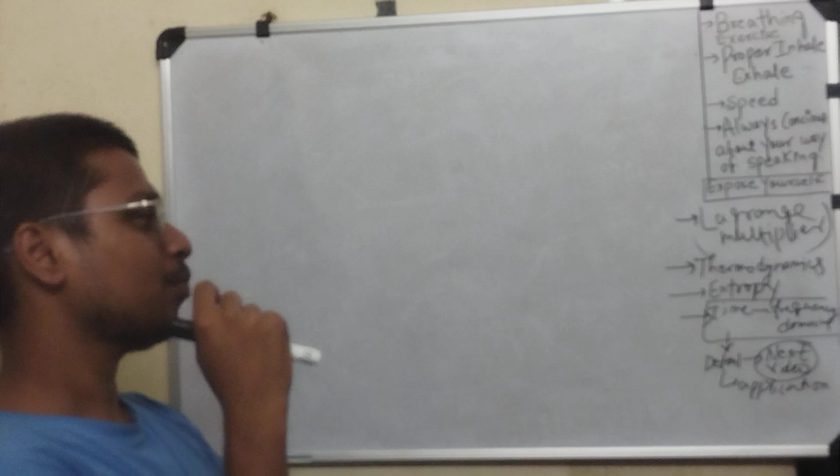We have HSA, high speed aerodynamics. Okay, so in low speed, the pressure change is so small that it does not change the density. But when we are talking about high speed flow, there is a huge change in pressure and temperature, so the density is also changing.

So the air is compressible, or the fluid gets compressed. So we have to make sure that while solving the flow equations, we consider the density field. We do not take density as constant, and we do not solve the energy equation and the flow equations separately as we have done in low speed aerodynamics.

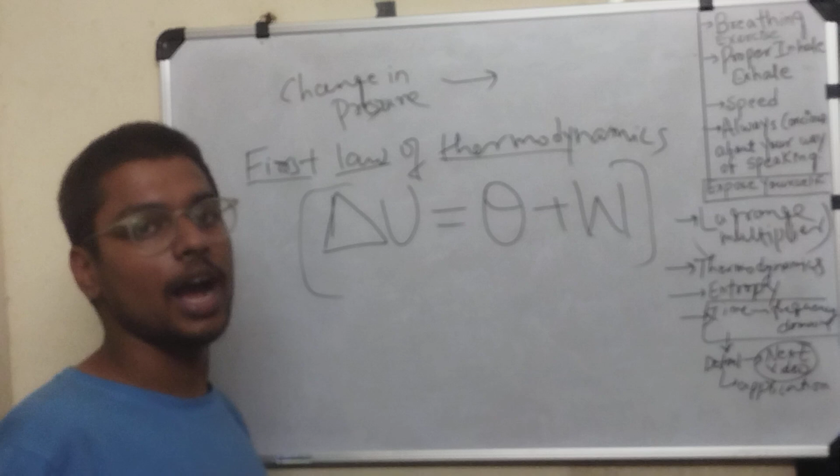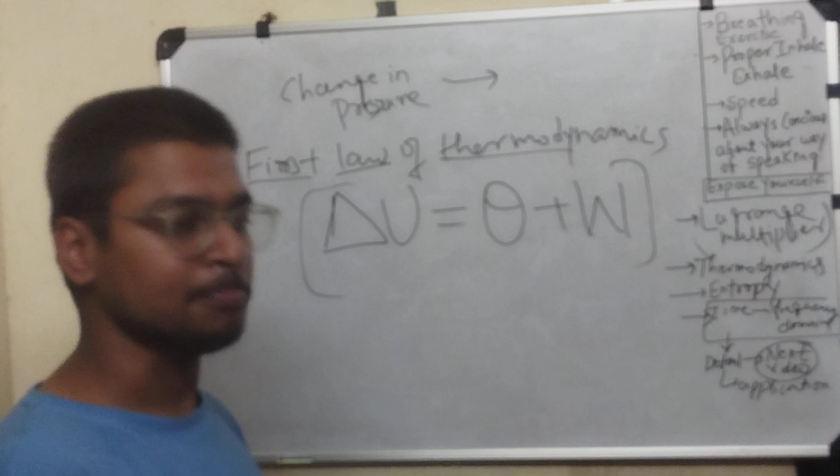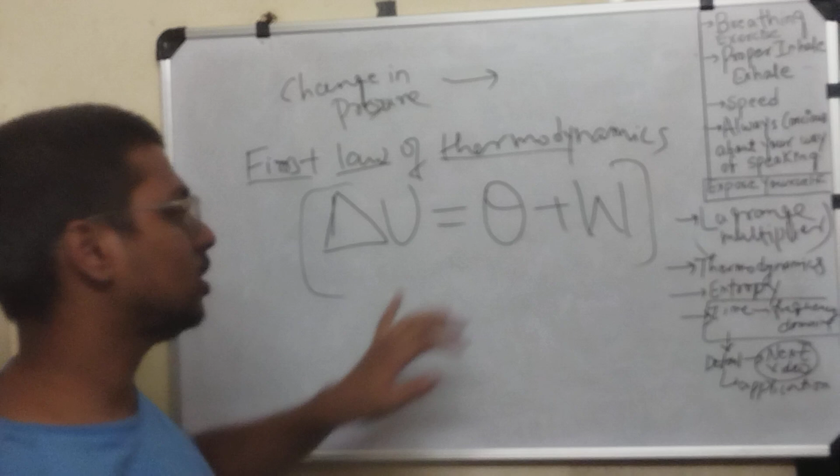So what is internal energy? Any system has particles which are constantly moving, vibrating at high temperature. So internal energy is the energy stored in the system in the form of vibration, the kinetic energy of the molecules. Q is the heat transfer, and W is the work done on the system.

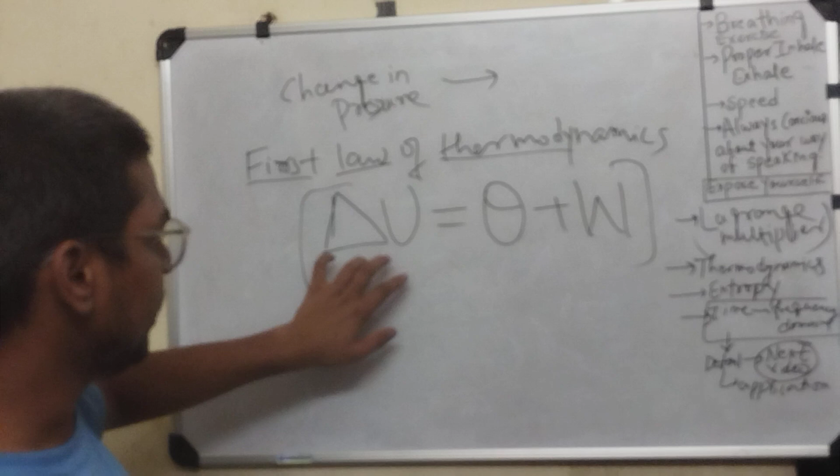So let me explain that when we go from one state to another state, the internal energy changes. Okay, so where does the energy go? It must be transferred into heat and work. Okay, nice.

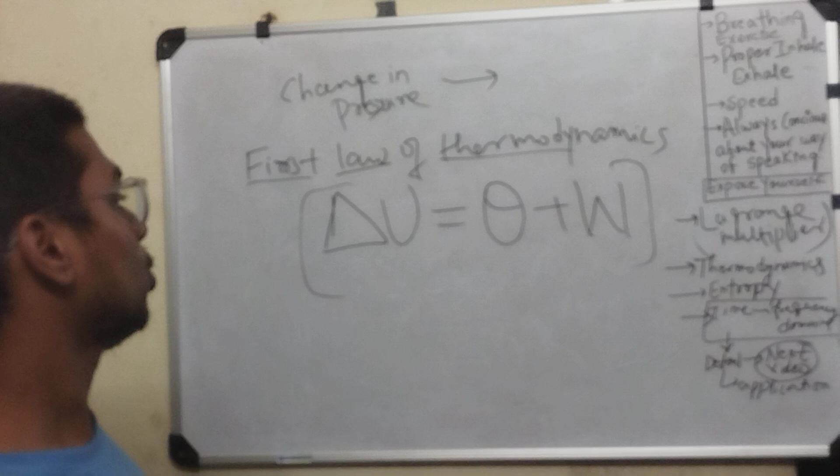Okay, let me start the discussion of entropy. I want to say where the entropy concept came from, how this word came into anyone's mind. It starts with the Carnot heat engine. You must have heard of or studied it in your class 12th exam. So in Carnot's heat engine,

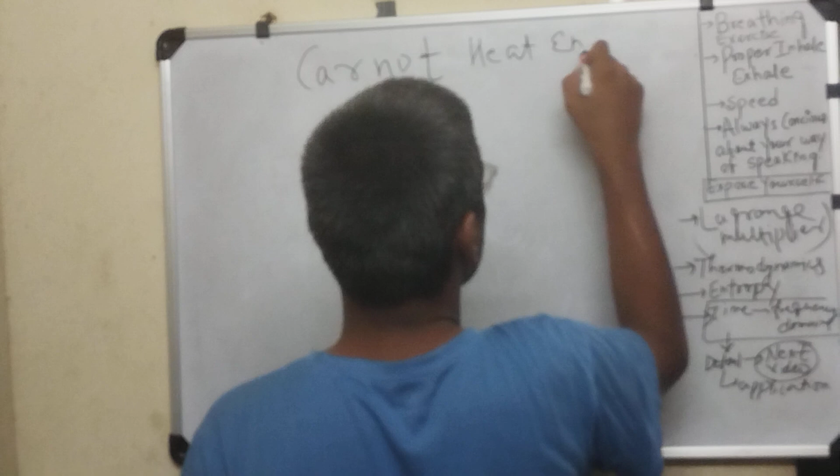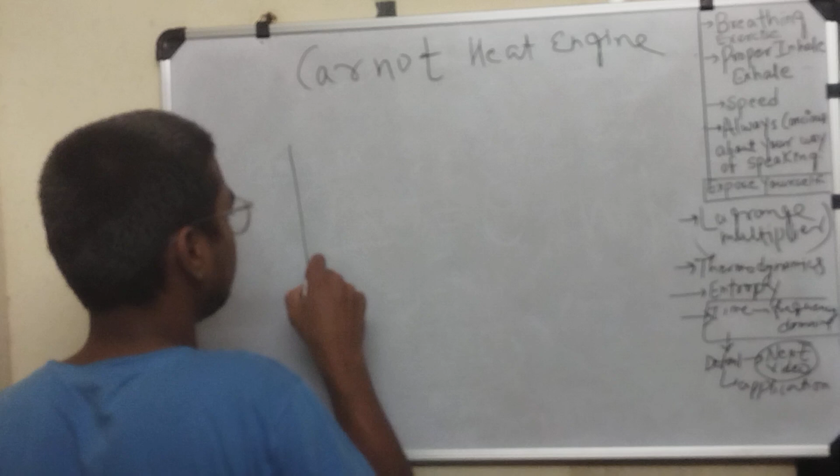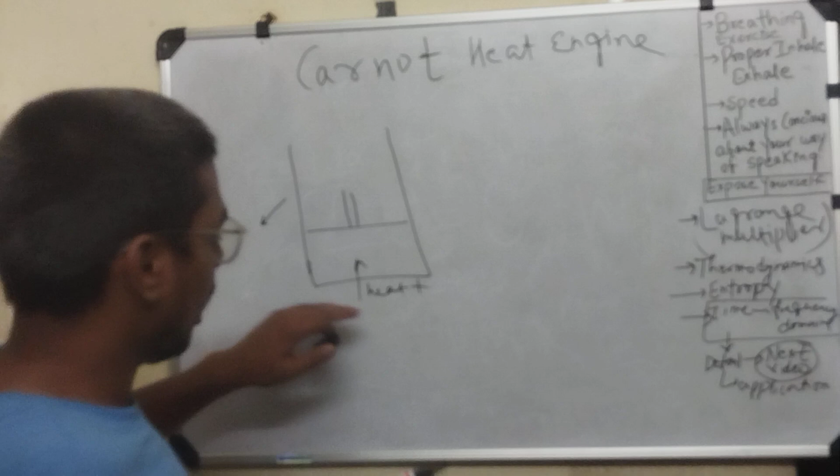Carnot is trying to see the maximum efficiency of the engine. So yeah, that is what it is all about. So there is a system, and this is the only part of the system where heat transfer is allowed. Here is the piston, and here is some flywheel, and there is some gas here, and here is the hot

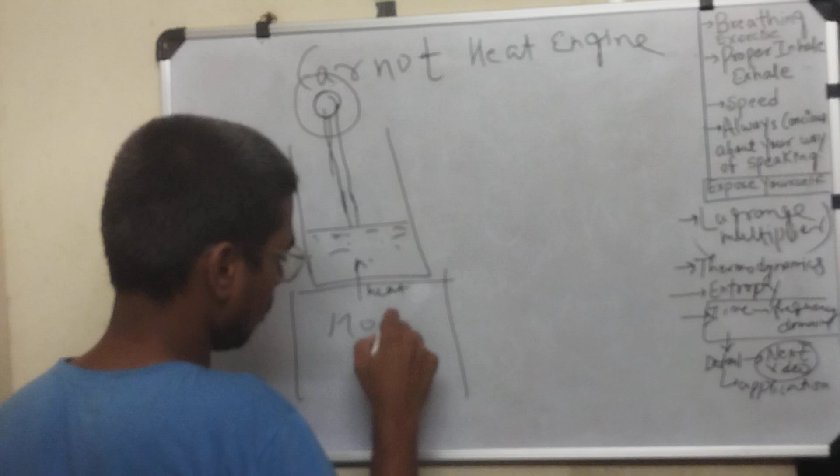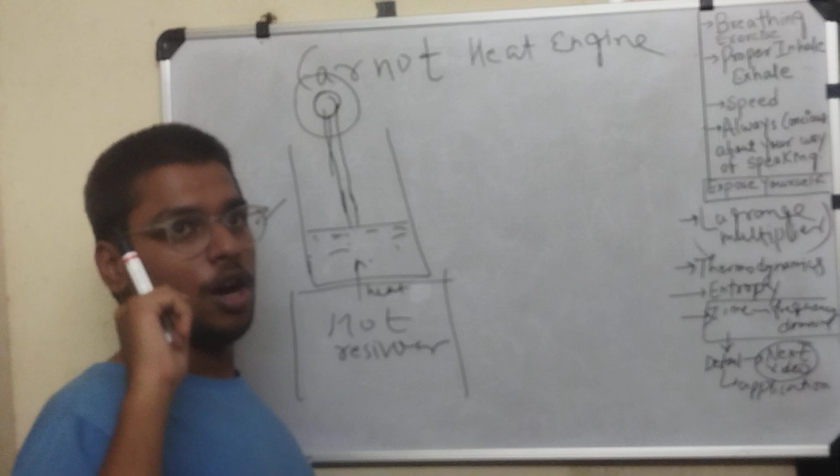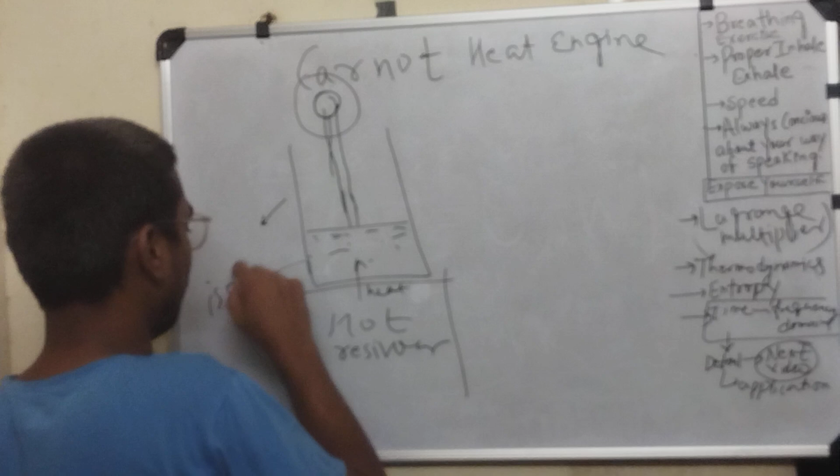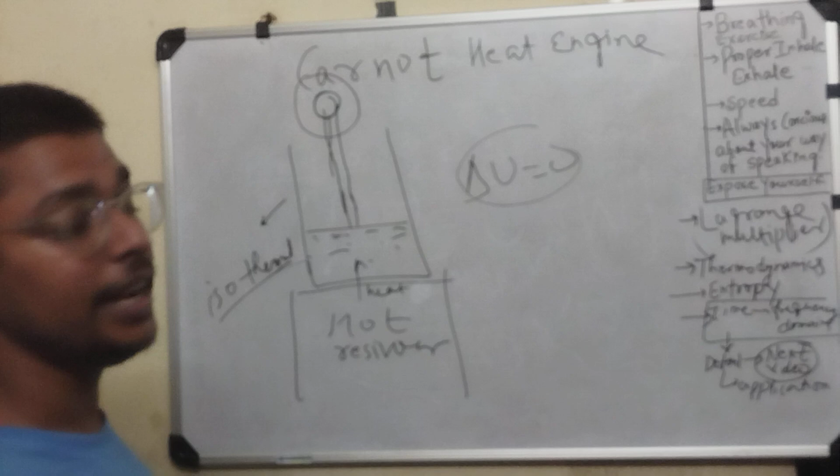reservoir. So first of all we are going to maintain the temperature, meaning the process is isothermal, and delta U is 0, meaning the heat which is transferred does not contribute to changing the internal energy of the system. It expands the gas, meaning the gas is doing work on the piston.

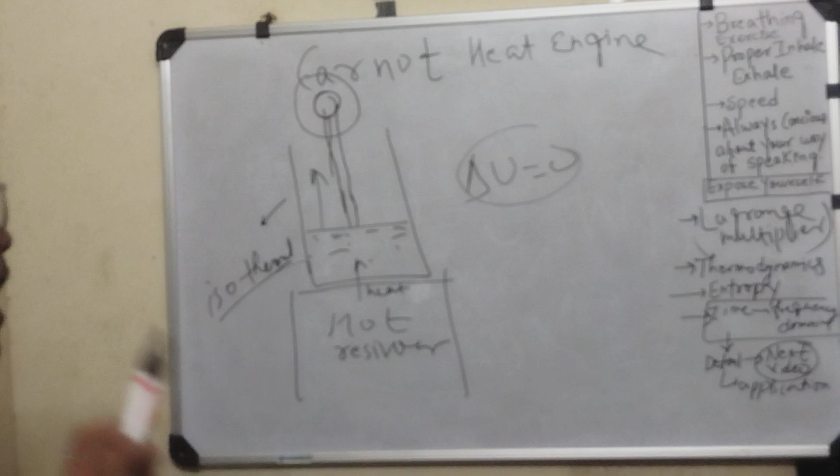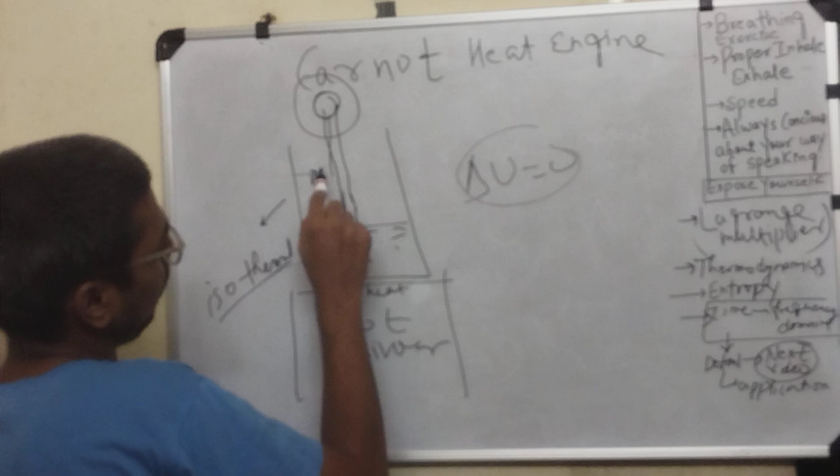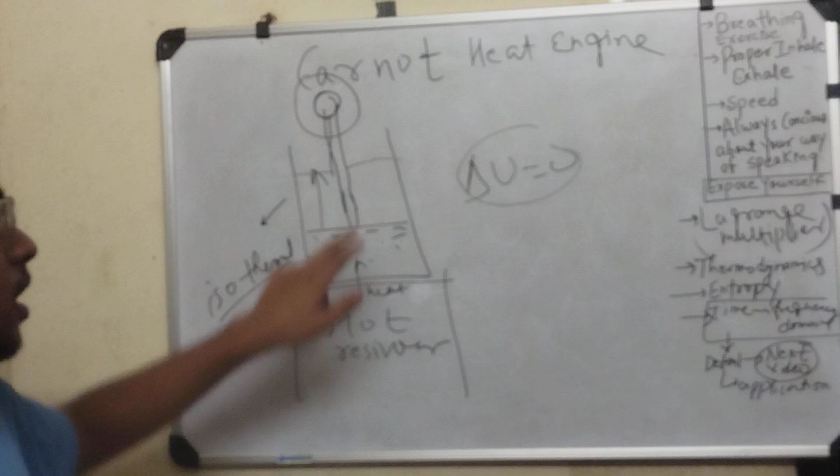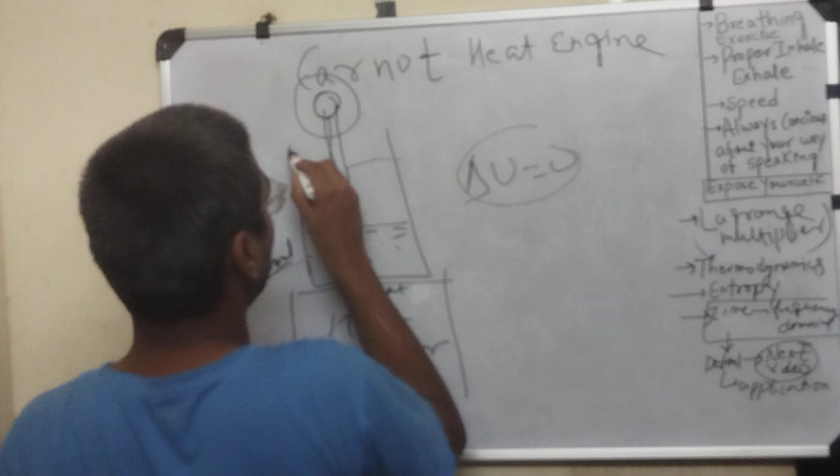Yeah. So as it moves up, the gas expands, and here's the important thing: when we take this out, and let's say the system is here, it also expands. So you ask how it expands, where the work comes in. So here the gas uses its internal energy to expand it more.

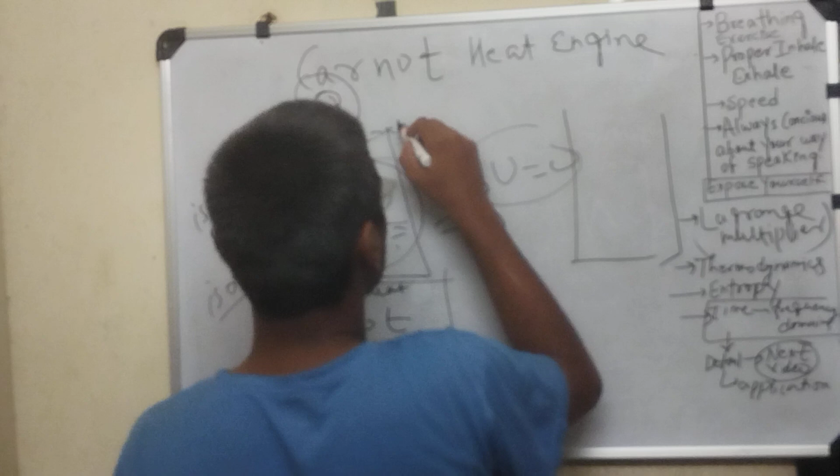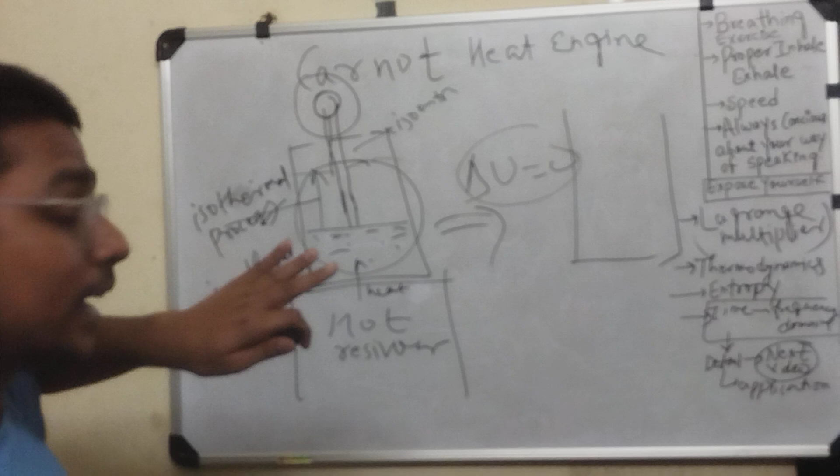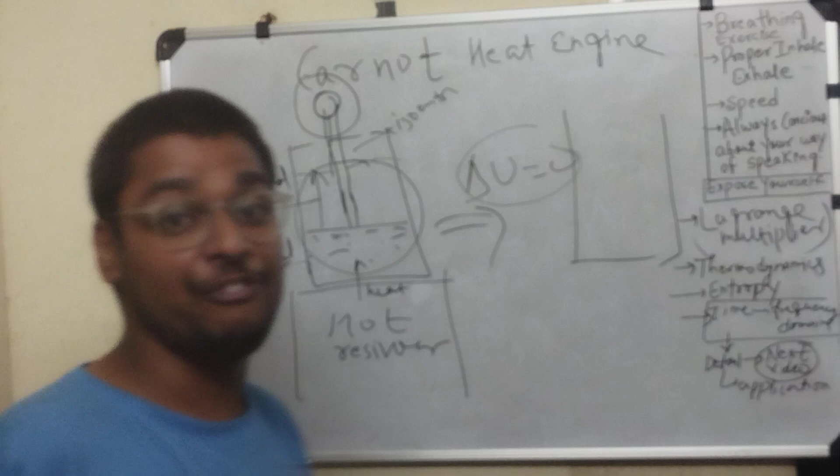And again, what we do in the second step: this is the isothermal process. This is the isentropic process. Again, what happens is that we are not able to achieve, and Carnot was not able to achieve, 100% efficiency, because if the engine wants to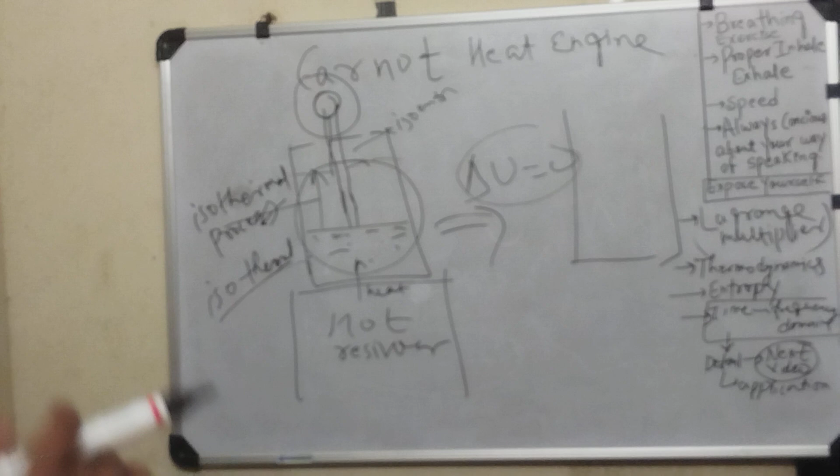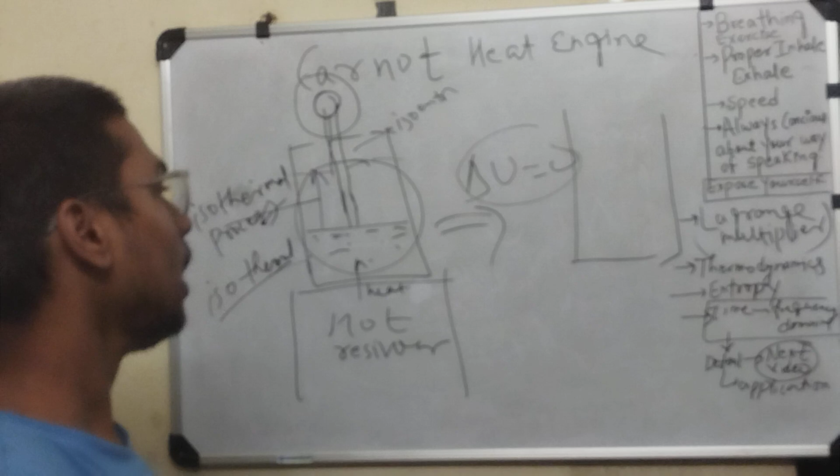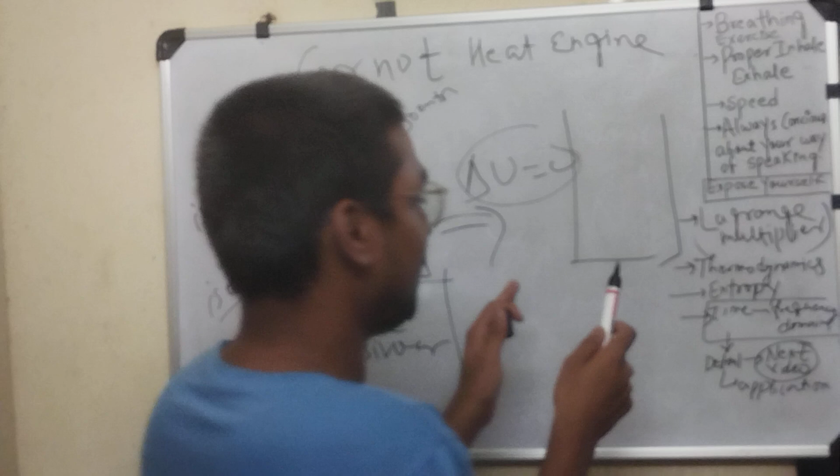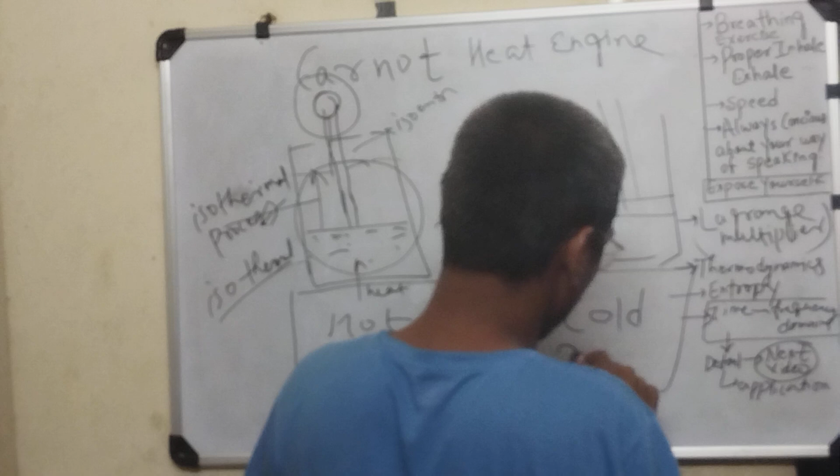come back to the same starting point, the piston has to do some work, and if it is the isothermal process, the work done by the piston to make sure that the piston will be here is converted into heat, and we store that heat in the cold reservoir, and it is the waste of the work.

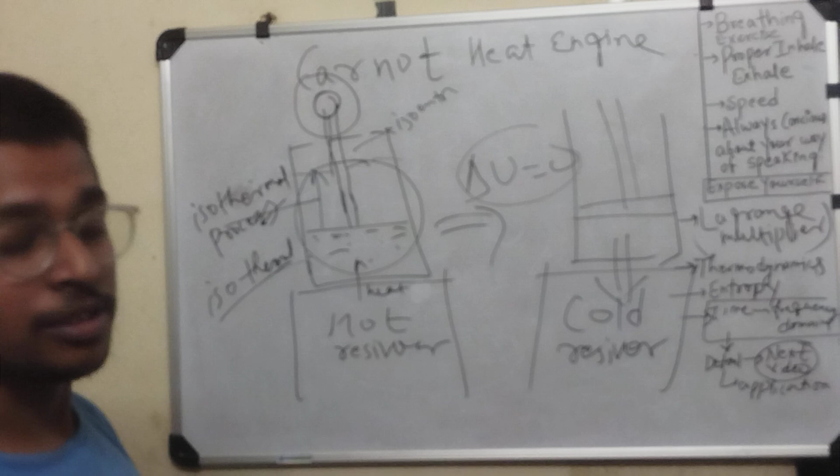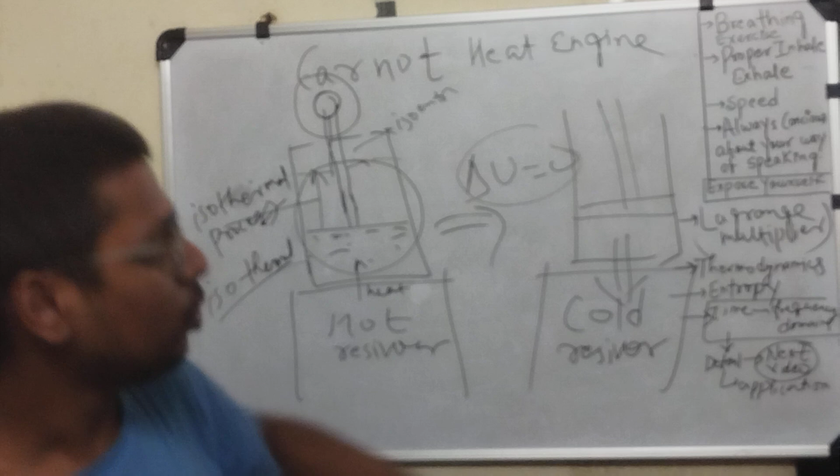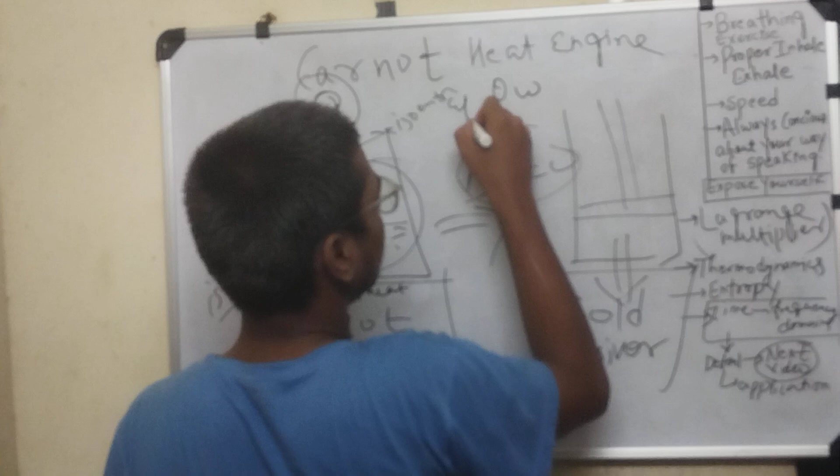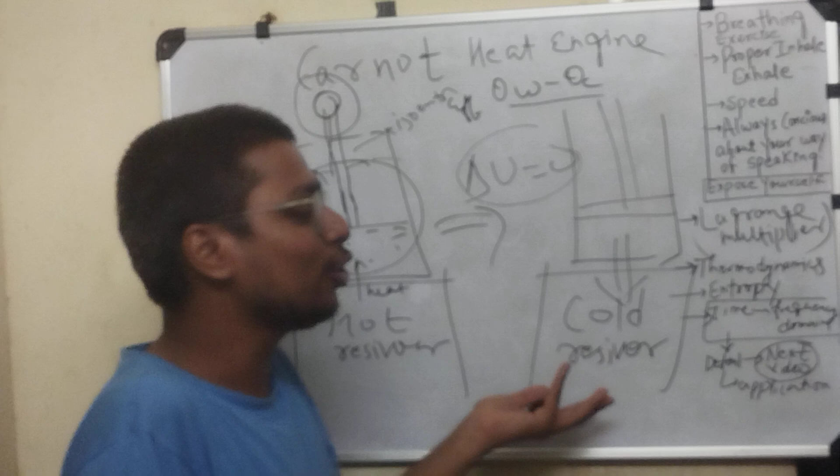Here, if we take the reversible condition, the whole heat is transferred into work, but here some amount of work is required to bring the piston to the original state. So that's why we write the efficiency. QW is the amount of heat we give, and QC is the amount of heat wasted, meaning we cannot use it. So efficiency is 1 minus QC by QW. This is the efficiency of the engine, and it is the reversible process.

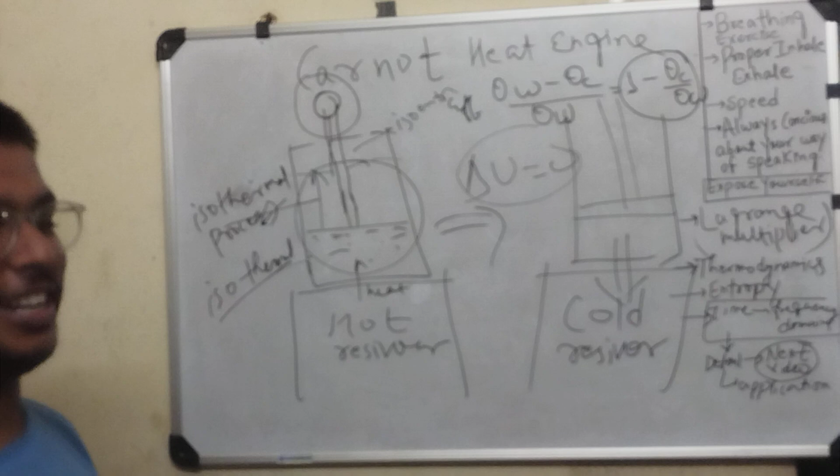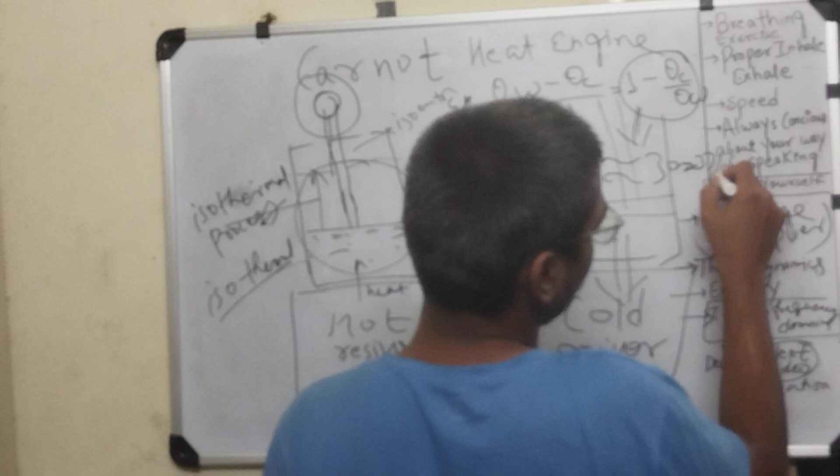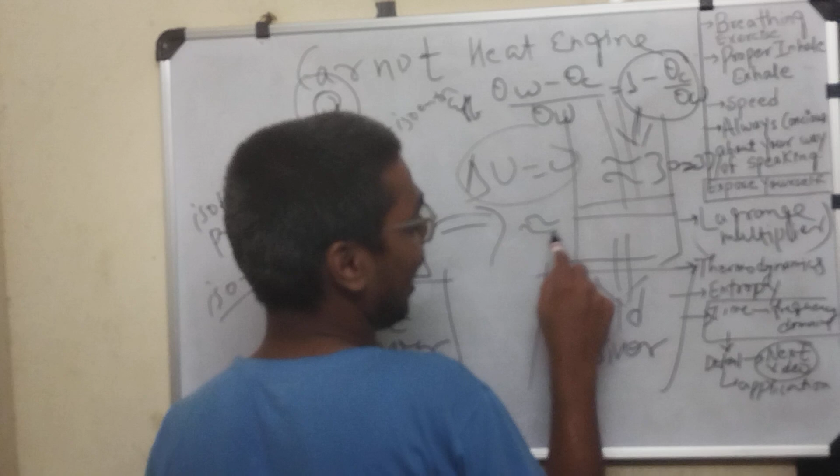Okay, so after some time, scientists studying the heat engine, I don't remember the scientist's name, I'm sorry, observed... okay, let me first tell you the real situation. At that time the efficiency was around 30 to 33%. Ideally, if we take the Carnot heat engine, but the real industrial efficiency we get is only 3%.

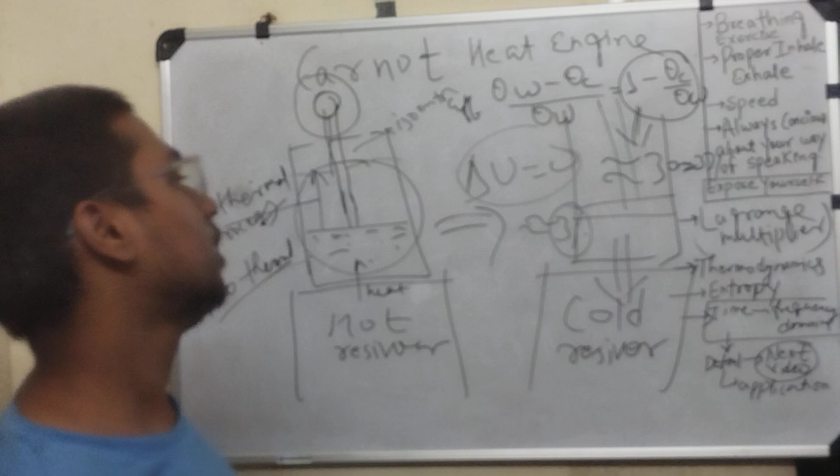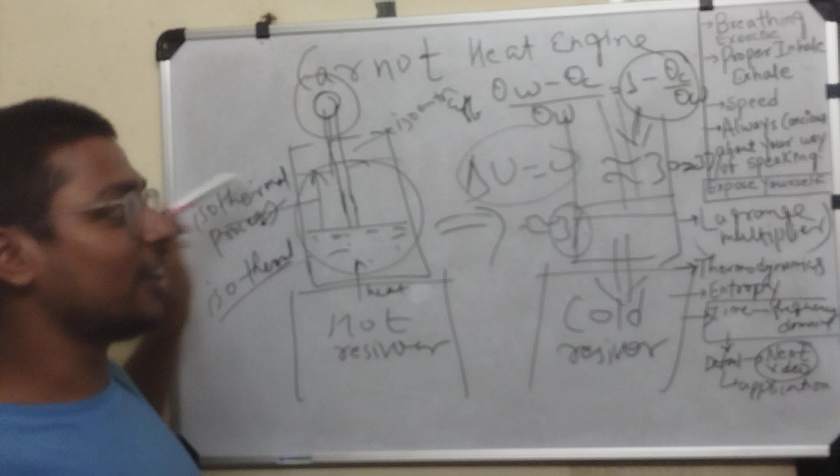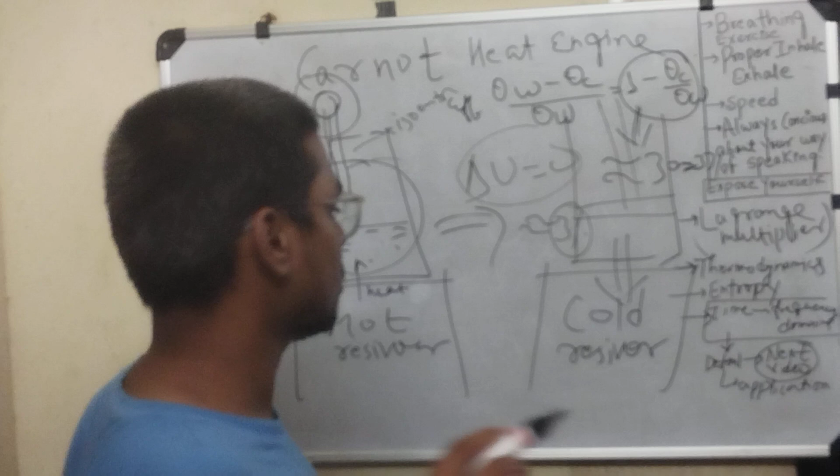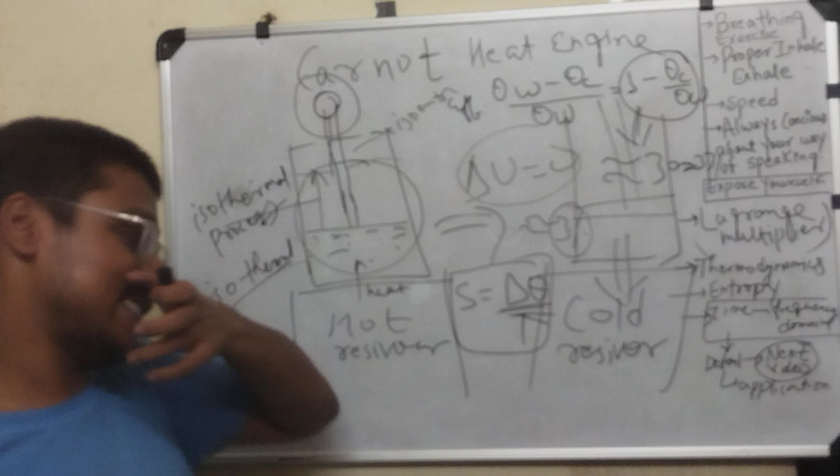As you know, in real life there is some friction, and heat is released into the surroundings. We never get a fully adiabatic container. So in an irreversible process, the total heat cannot convert into total work. Some amount of heat gets wasted, and entropy is defined as delta Q by T. So entropy is the amount of heat wasted, and it relates to the absolute temperature of the system. So it is defined as delta Q by T.

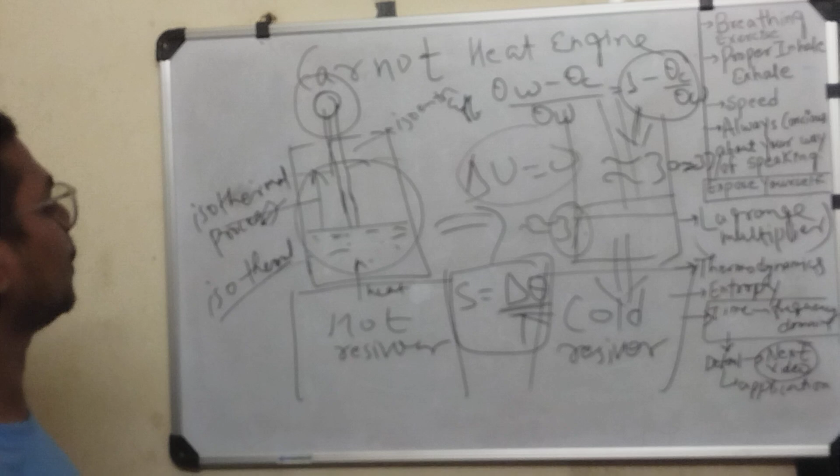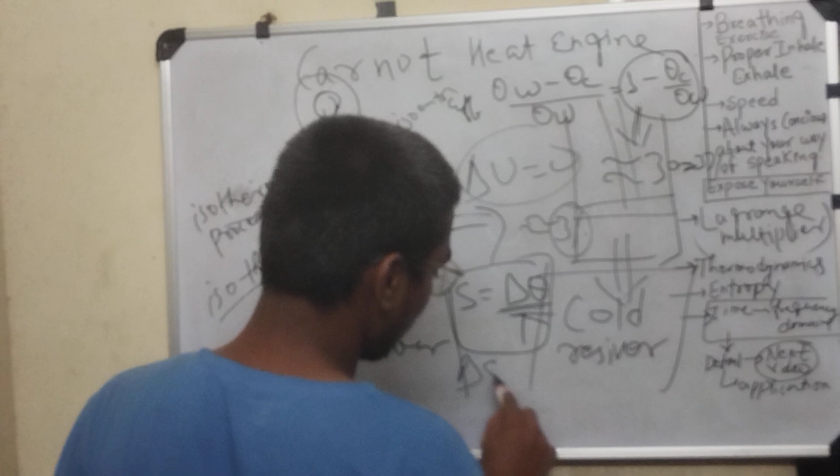So in real life, the system's delta S is always greater than 0. In a reversible process, delta S is 0 because all the heat is converted into work, but in real situations delta S is greater than 0. So whatever we do on this earth, the process is always irreversible. So some amount of heat energy gets released as waste that is not converted into useful work.

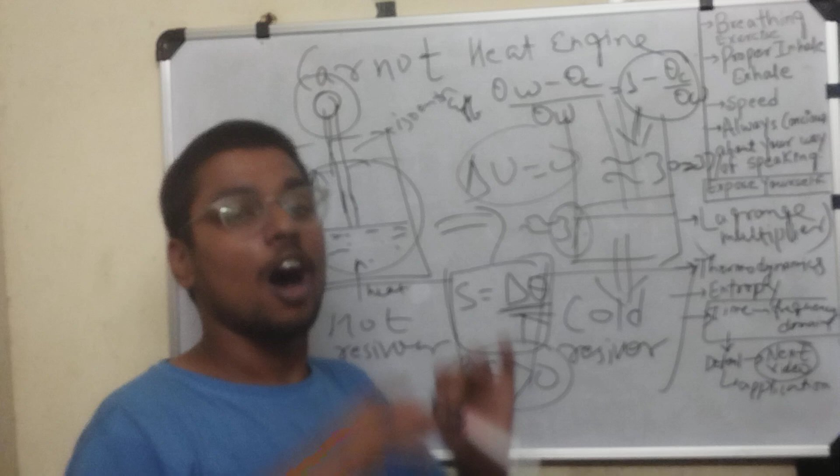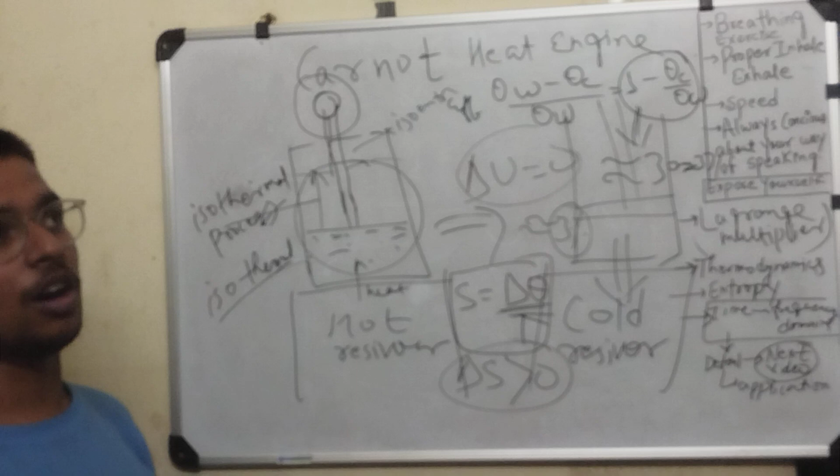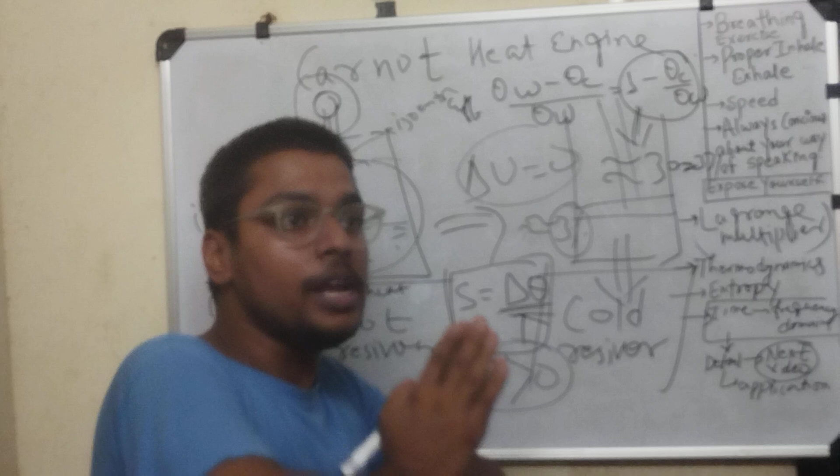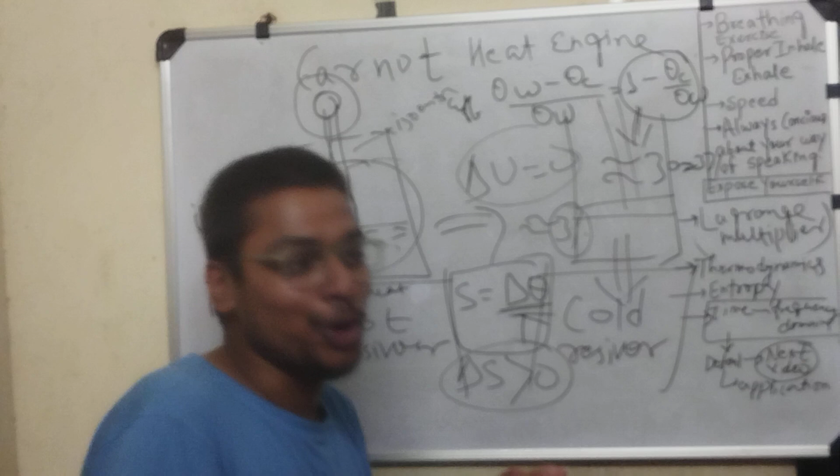So how are we alive, how do we get energy? The sun in our solar system gives us energy of low entropy. Low entropy means it is in a condensed state. This low entropy energy in a more condensed state is used by us, and when we do the process, the low entropy energy converts into high entropy energy, and it transfers back into space.

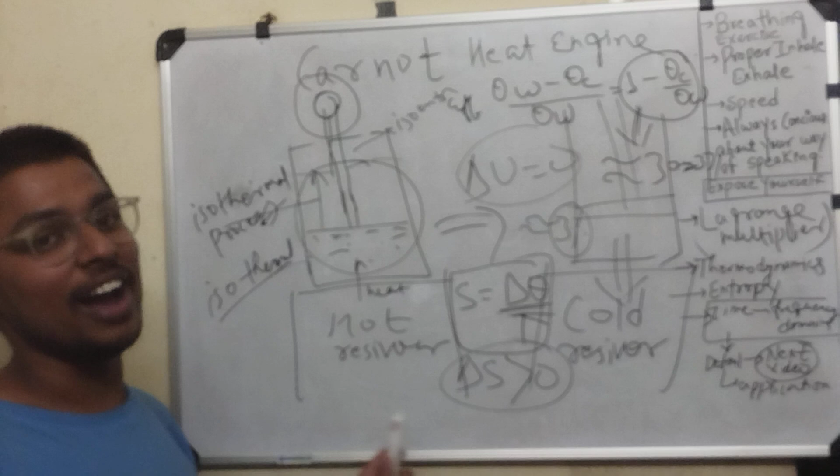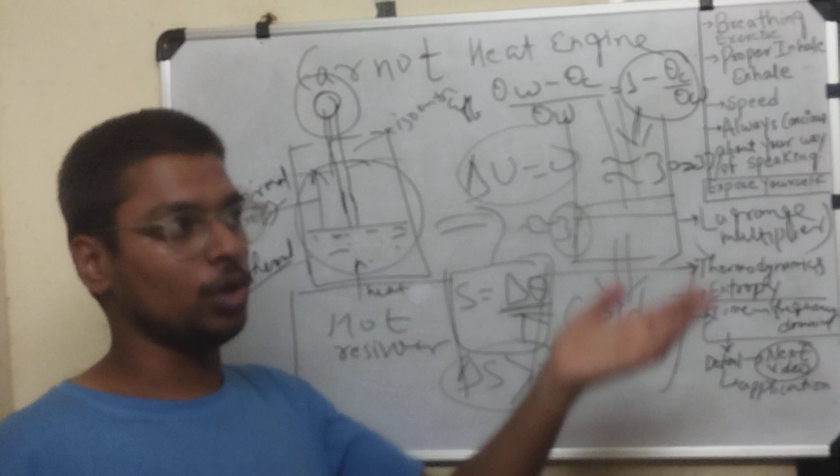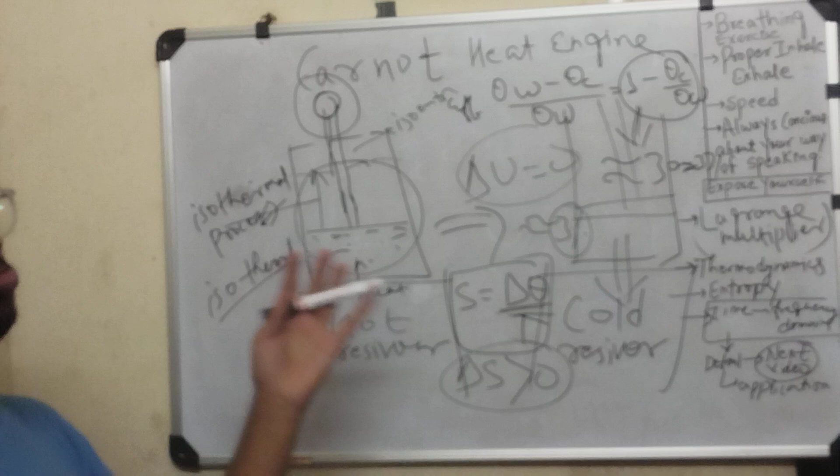And you may have a question: from where does the sun get low entropy? I am not aware of that. Maybe the stars, the universe. So that is why delta S is important, and you have to appreciate why the sun is important for life on earth. It gives low entropy, highly condensed energy, and we convert it into high entropy and more... I forgot the word. Okay, maybe you understand.

Okay, let me start with the.

Okay, so let me start with time and frequency domain transformation. First of all, what is time domain, and what is frequency domain? Okay, so as we know, I have to give you an example of a spring mass system. So let me consider a spring, and we are applying a force F at any instant.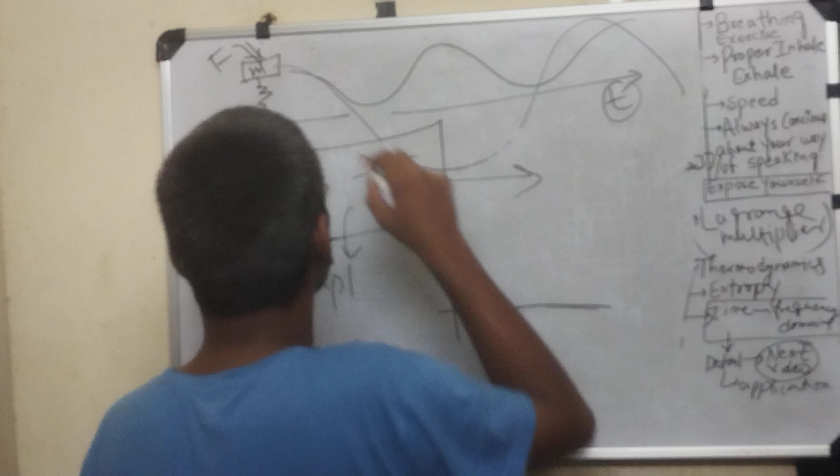We need to convert time domain into frequency domain because, in convolution, when we convert a time domain, let me apply at any instant t naught equal to 0. At t naught it will be like applying a force, it will convert into frequency like this, and then we add an infinite number of points, so we get the input q(t), and we have to add all of them.

So for adding the whole time domain impulse response, we are using the convolution theorem. But when we go into the frequency domain, we do not need to use the convolution theorem. Okay, so I will explain this all in another video.

Let me also give you some idea about the Fourier series, Fourier transform, and Laplace transform. So what is a Fourier series? Any periodic function, whether it is a sine wave, a square wave, a triangular wave, anything, we can write as a sum of sines and cosines.